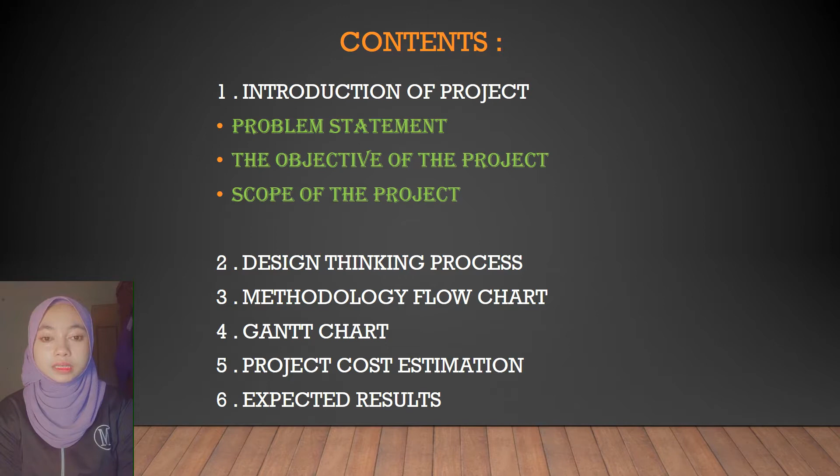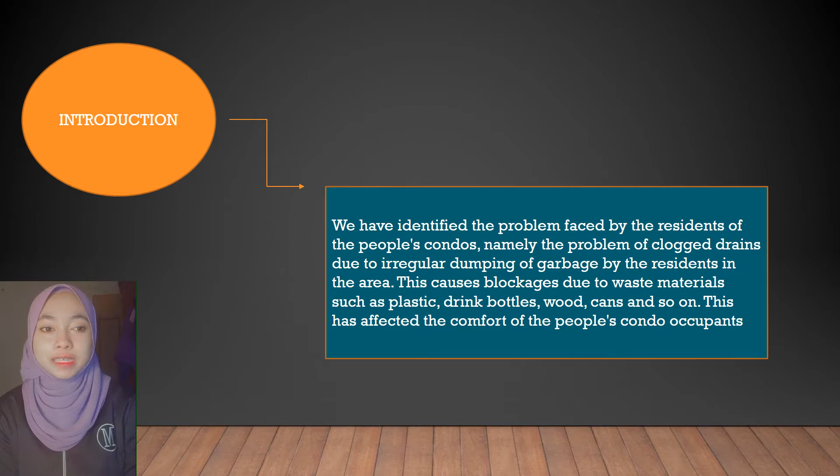I will explain the introduction for our project, Smart Trap. We have identified the problem faced by residents of the people's condos, namely the problem of clogged drains due to irregular dumping of garbage by residents in the area.

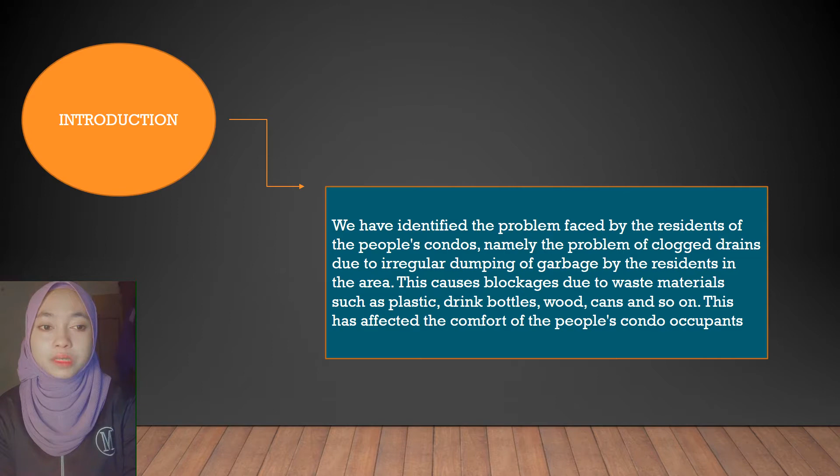This causes blockage due to waste materials such as plastic, drink bottles, wood, cans, and so on. This has affected the comfort of the people's condo occupants.

Next, I will explain about the problem statement, which is divided into two. The first is dumping of rubbish unevenly causes the breeding of Aedes mosquitoes, which can threaten the life of condo residents, and irregular waste management can lead to the breeding of dangerous animals such as rats, cockroaches, etc.

...in the surrounding area. The second is that irregular waste management can lead to the breeding of dangerous animals such as rats and cockroaches, etc. if not prevented.

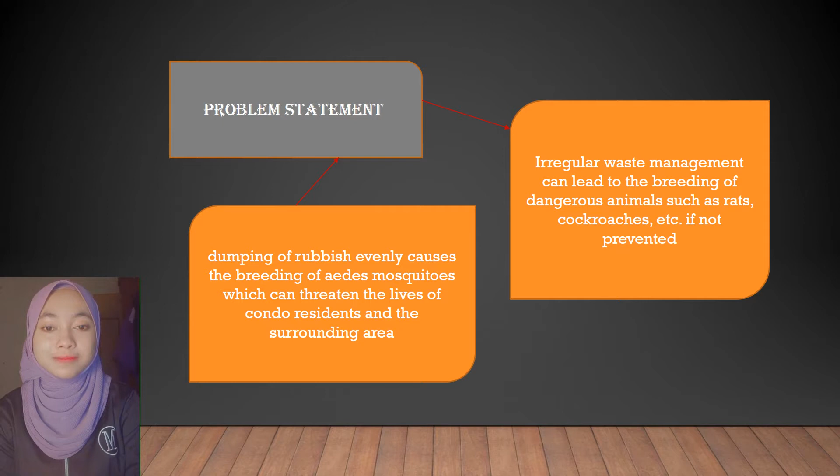Objective of the project: first is to identify the type of waste that causes clogged drains. We identified the garbage that caused the drain to clog, and we went to the people's condo and saw for ourselves the condition of the drain there.

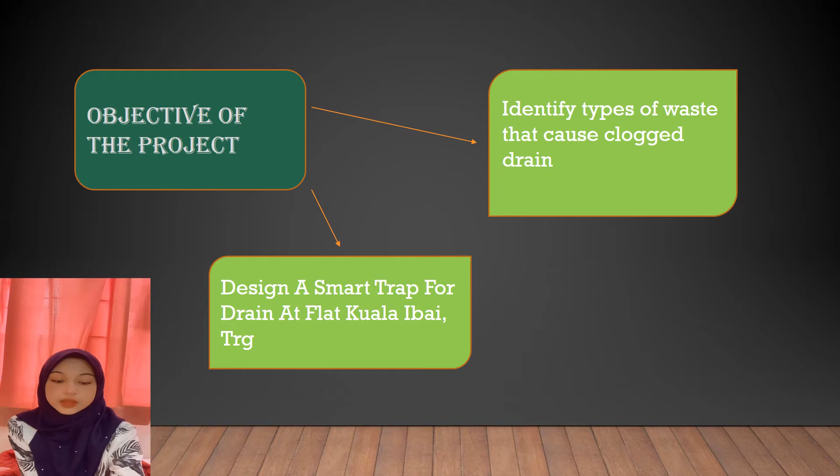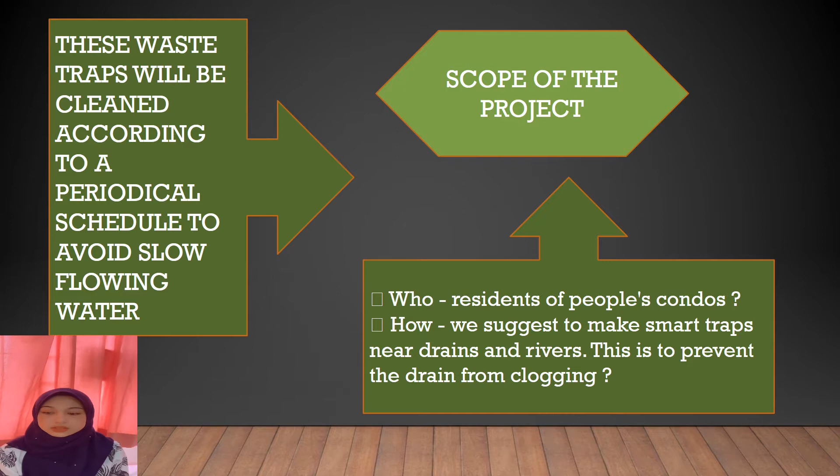The scope of the project is that these waste traps will be cleaned according to a periodical schedule to avoid slow flowing water. Next is who: residents of people's condos. How: we suggest making smart traps near drains and rivers to prevent the drains from clogging.

Next is design thinking process. First is case study: ask some questions to the people's condo residents about the clogged drains problem they face. Do an internet search and conduct an interview session with the residents, asking questions about the clogged drains, and interview them after preparing questions deemed appropriate for the study.

Second is using the answers collected as data, dividing respondents into those who are skilled and unskilled about smart traps. After residents finish answering the questions, we make a data table suitable for our problem.

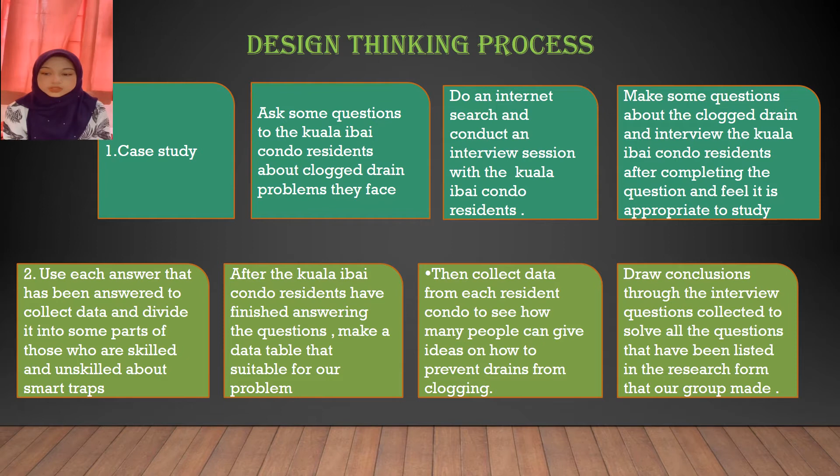Then collect data from each resident to see how many people can give ideas on how to prevent drains from clogging. Draw a conclusion through the interview questions collected to solve all the questions listed in the research form our group made.

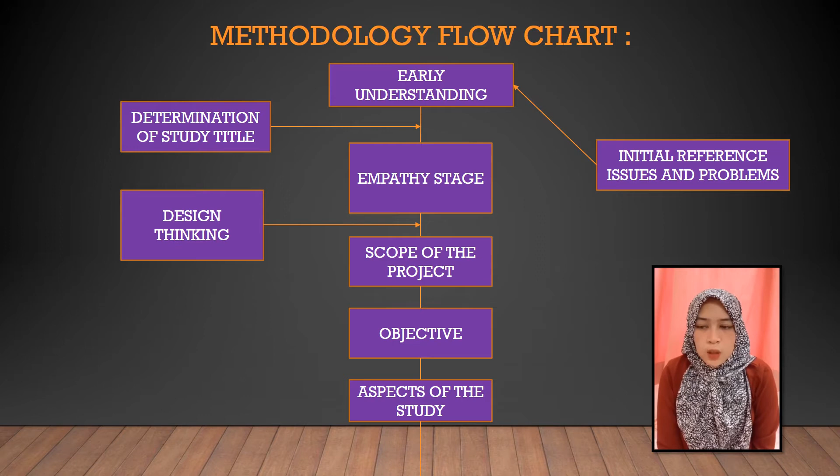Methodology flowchart: first, we need to understand the initial reference issue and problem, and determine the study title. Second, empathy stage, where we think about design thinking. Third, scope of the project. Fourth, objective. Fifth, aspect of the study.

We have three more: first, periodic cleaning method; second, make regular monitoring; third, total cost involved.

Data collection: we need to make observations. We underwent two months to make the observation.

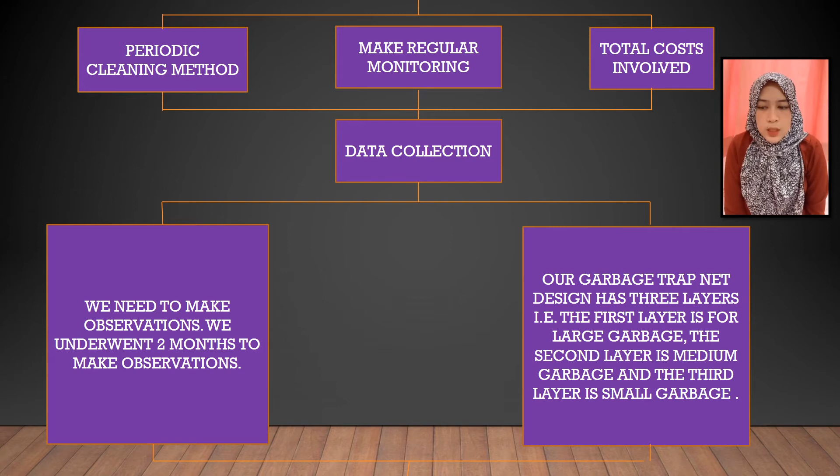Our garbage trap net design has three layers. The first layer is for large garbage, the second layer is for medium garbage, and the third layer is for small garbage.

Methodology flowchart: first, we need to understand the initial reference issue and problem, and determine the study title. Second, empathy stage, where we think about design thinking. Third, scope of the project. Fourth, objective. Fifth, aspect of the study.

I will explain about the Gantt chart, which shows the final year project planning for the title Smart Trap.

The first project activity is finding the project title, planned and implemented in the first week, continuing to the second week. Next, provide design thinking stage 1, 2 and 3, planned in the third week, implemented from the fourth to sixth week.

To provide design thinking stage 1 to stage 5, planning is done in the 6th and 7th week, while implementation is in the 8th to 10th week.

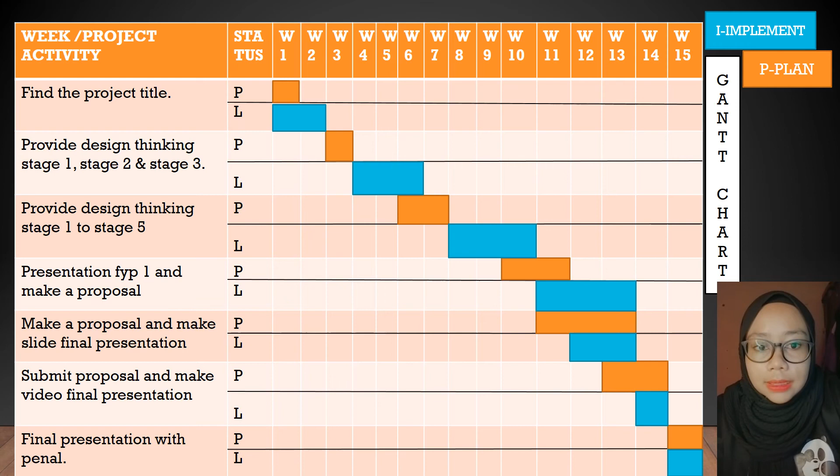Last but not least, submit proposal and make video for final presentation, planned for weeks 13 and 14, implemented in week 14. Lastly, final presentation with panel is planned for week 15, implemented in week 15.

Next, project cost estimation. The items are divided into four. First, diameter PVC pendant wire, with a quantity of 4, costing RM100.

The second is steel, with a quantity of 4, costing RM50. The third is the screw, with a quantity of 30, costing RM5. The fourth is plier, with a quantity of 4, priced at RM8.

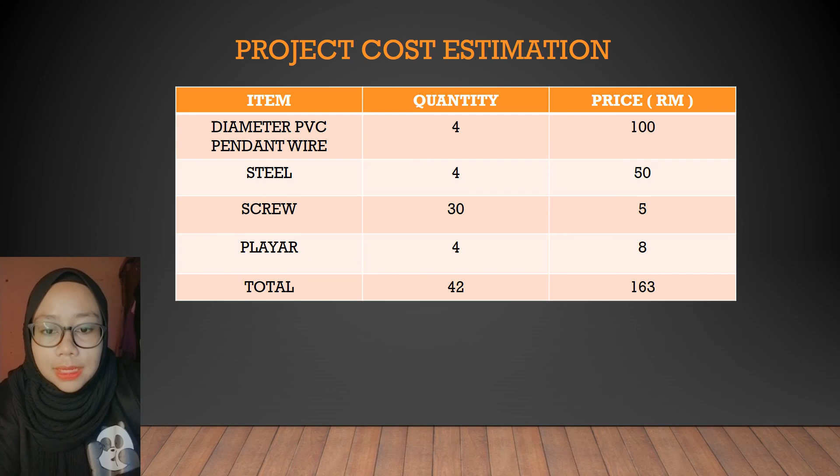Finally, the total project cost estimation is RM163. The last slide is the expected result.